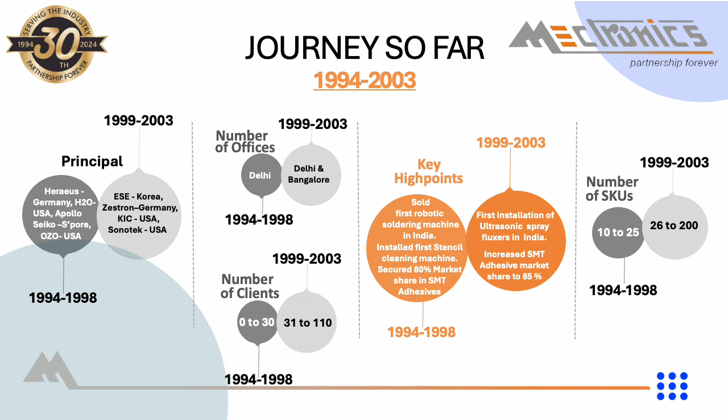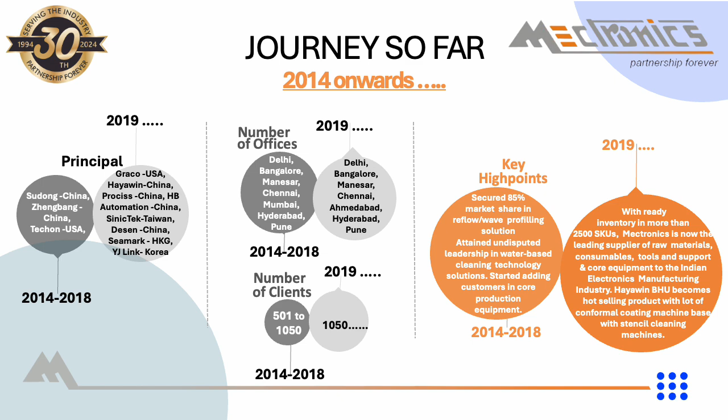Moving ahead from consumables and tools to equipment, in the last 4 to 5 years Mectronics has gained market share in PCBA machines, and now Mectronics bids their equipment in all the leading projects in India. Substantial appreciation has been received from the industry for the equipment sold by Mectronics, specifically for the BHUs from Hayawin, and hundreds of Hayawin BHUs are operational in the market.

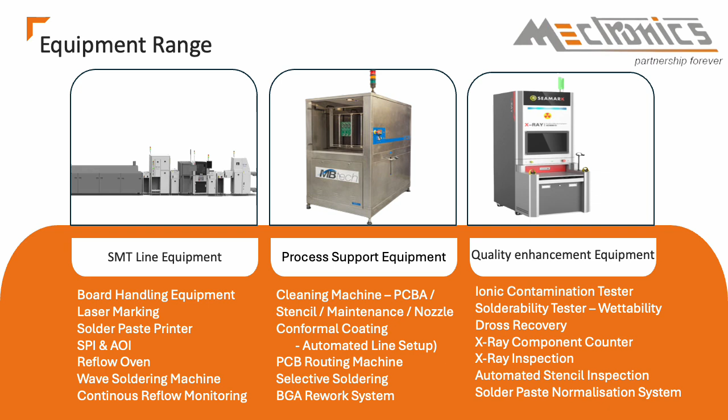Huge installation base for EPS stencil cleaning, MB-Tech PCB cleaning, Prociss conformal coating machines, EVS dross recovery machines exist all over India. After KIC profilers, now KIC RPI is the industry standard system for continuous monitoring of reflow ovens.

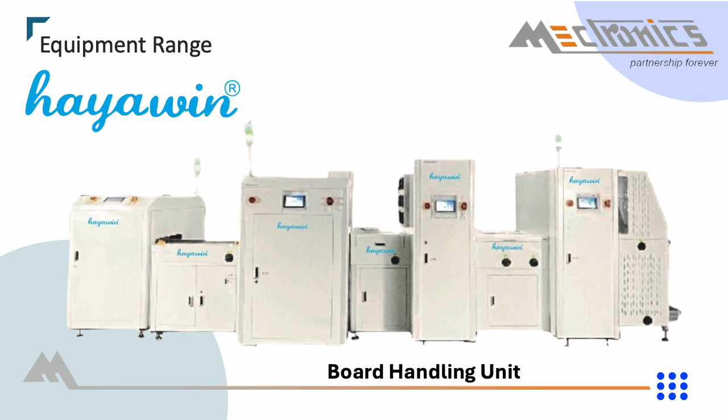Hayawin is one of the top 3 suppliers of board handling equipment in world market. They specialize in high-precision solutions for PCB handling. Hayawin's products offer durability, reliability, and flexibility for various PCB sizes and production environments.

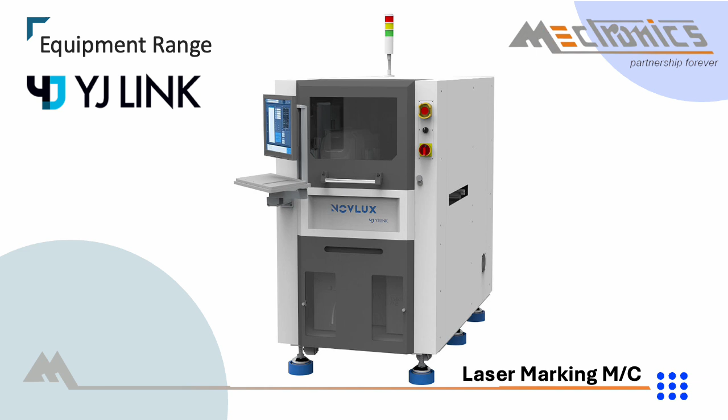YJ Link Korea's CO2-based laser marking machine offers precise and permanent marking solutions for various materials, including PCBs. It delivers high-speed, non-contact marking with excellent accuracy, ideal for traceability and branding in electronics manufacturing.

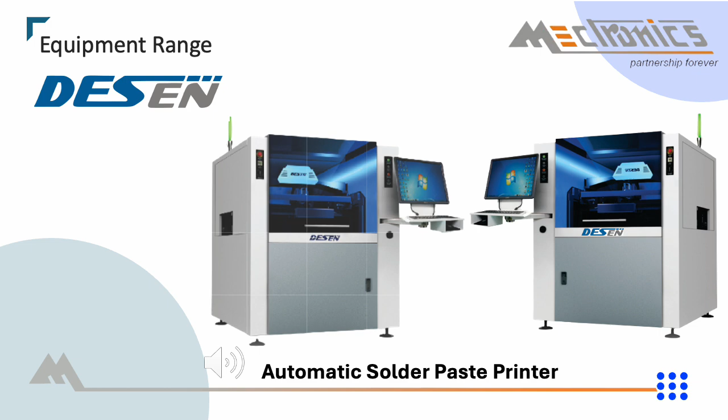Desen is one of the leading brands globally for high-end solder paste printer. Desen features advanced precision alignment technology, ensuring highly accurate stencil printing for improved soldered joint quality.

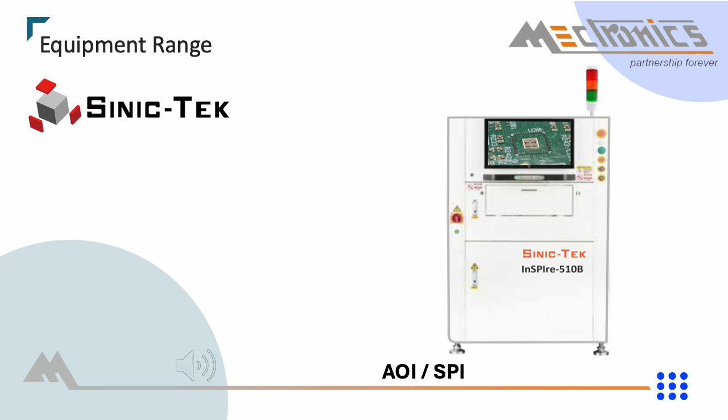Sinic-Tek Taiwan's SPI and AOI systems integrate cutting-edge 3D imaging technology, providing highly accurate real-time inspection for both solder paste and component defects, ensuring superior quality control in electronics assembly.

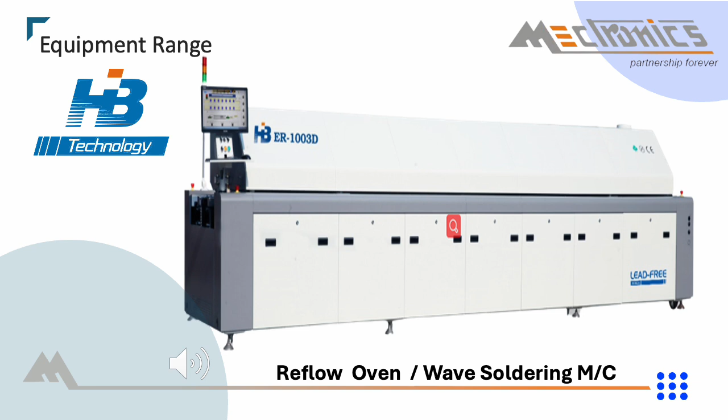HB Technology, China's reflow machines and wave soldering feature energy-efficient heating systems that reduce power consumption while maintaining optimal thermal profiles. Additionally, they offer precise temperature control with uniform heat distribution, ensuring reliable solder joints and minimizing defects in PCB assembly.

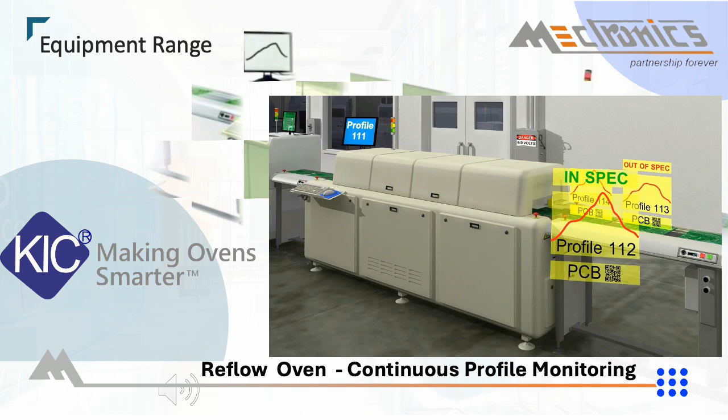KIC RPI is a very effective system for zero-defect manufacturing. With KIC RPI, complete traceability of each and every board produced is possible.

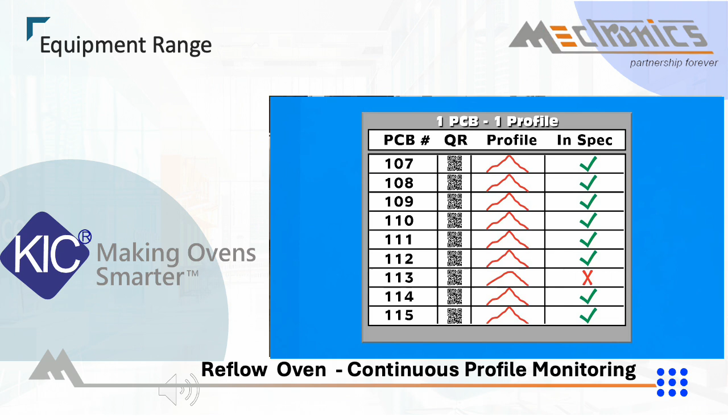It can be interfaced with a barcode reader. Each and every produced board will have its thermal profile. KIC RPI can be integrated with SMEMA, and hence if any problem is observed, the SMT line can be stopped until the problem is rectified.

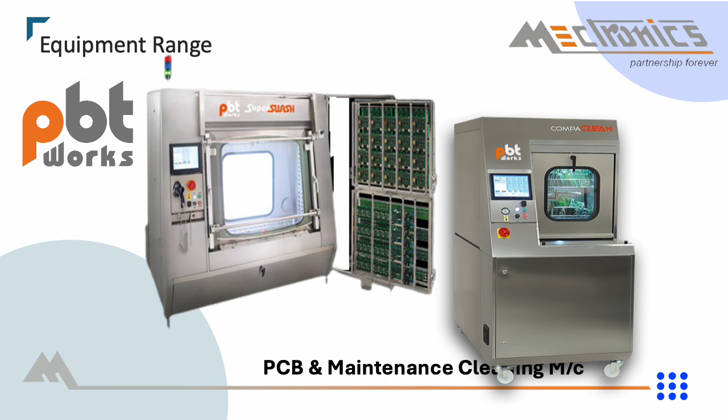PBT Czech Republic specializes in advanced PCB, stencil cleaning and maintenance cleaning systems that ensure thorough removal of solder paste and contaminants. Their solutions use environmentally friendly technologies, enhancing production quality while maintaining sustainability in electronics manufacturing.

MB-Tech France offers comprehensive cleaning solutions for stencils, PCBs, and maintenance, ensuring high-efficiency contaminant removal. Their systems focus on optimizing production quality while supporting eco-friendly and cost-effective cleaning processes in electronics manufacturing.

Make in India, EPS stencil cleaning machines are very reliable, efficient, and cost-effective to be used with water-based cleaning chemicals.

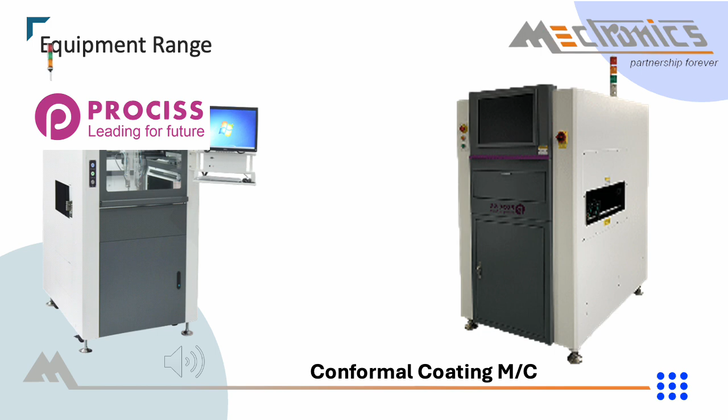Prociss conformal coating machine have multiple models to cater to all kinds of conformal coating. Very efficient and reliable machine with a lot of installations at multinational companies. EPS conformal coating made-in-India machine is very accurate and precise, with a lot of installations in India and worldwide.

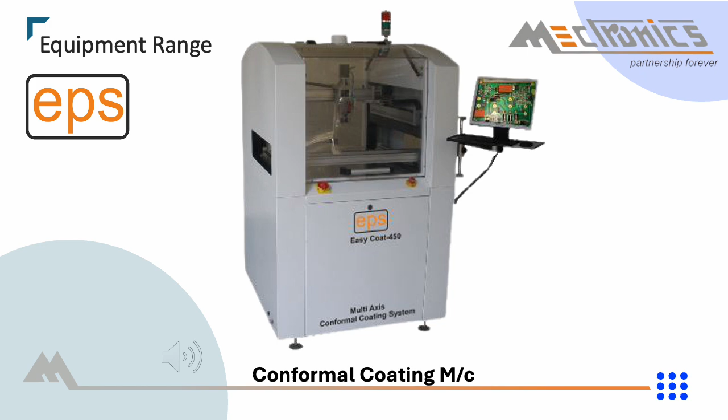EPS is an Indian company, producing wave soldering machine and reflow oven for low to mid-range production. Also makes small solder dross recovery machine.

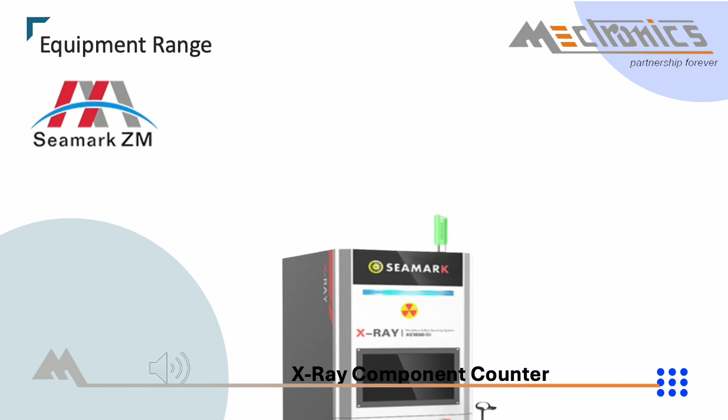X-ray counting machines comply with strict CE and FDA standards.

YJ Link Korea's PCB routing machine delivers precise and automated depaneling, enhancing efficiency and reducing stress on delicate circuit boards during separation.

AST China's selective soldering machines feature precise robotic control for targeted soldering, minimizing thermal damage and optimizing solder joint quality. Automatic nozzle changer, multiple solder bath, and modularity are high points of the machine.

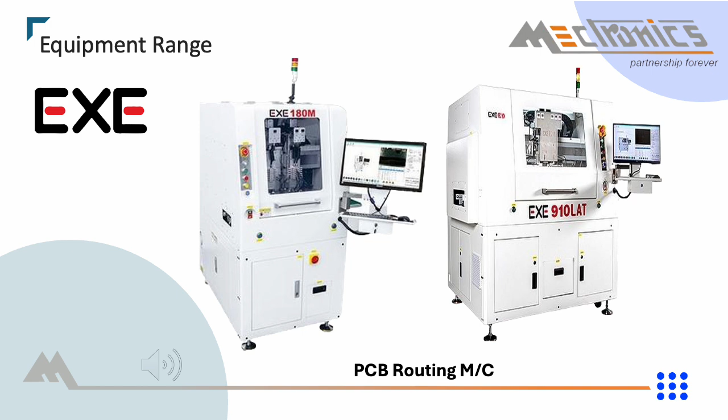EXE's routing machine utilizes a high-precision German spindle, ensuring superior accuracy and durability in PCB depaneling.

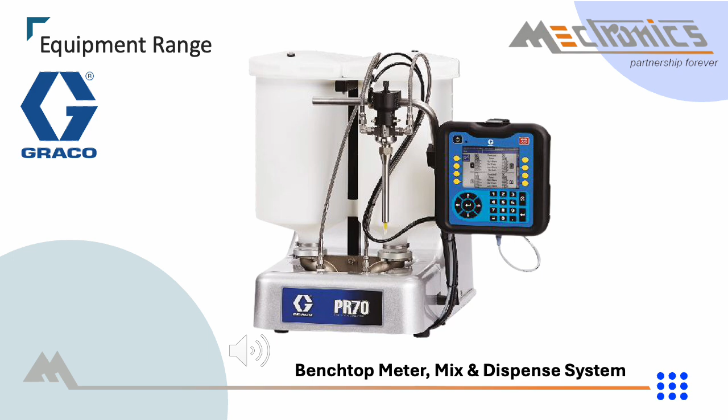Graco USA's two-part dispensing systems deliver precise mixing and dispensing of multi-component materials, ensuring consistent quality in adhesive, sealant, and potting applications. Their advanced control systems and robust design support a wide range of viscosities, making it versatile for various industrial applications.

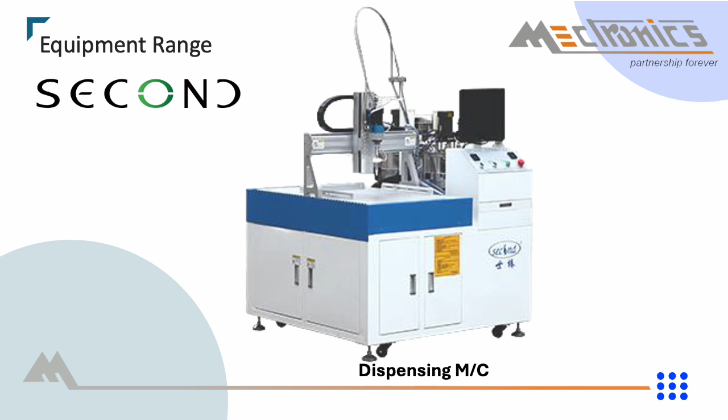Second, a company from China, believes that the customer is first and hence they are second to them. Second produces all kinds of dispensing applications with a wide range of viscosities, from one part to multi-component material, used in sealing, potting, and dispensing applications.

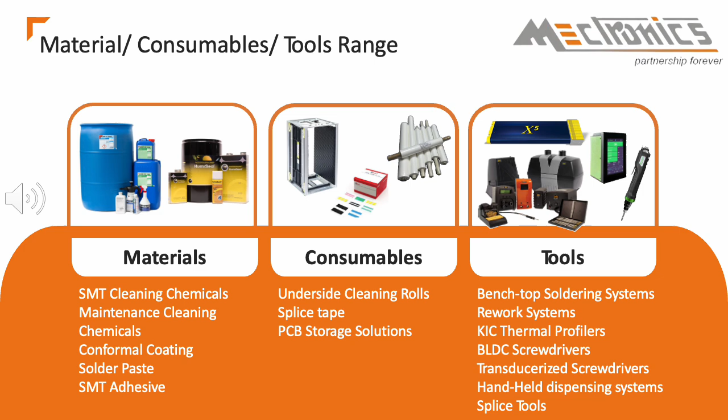Heraeus is a high-end manufacturer of precision-engineered solder paste and SMT adhesive materials designed for reliable and efficient soldering in advanced electronic assemblies.

Zestron specializes in providing high-quality cleaning solutions and services for the electronics industry, focusing on the effective removal of contaminants to ensure the reliability and performance of electronic components and assemblies. Their products and expertise help manufacturers achieve superior cleanliness standards in their processes.

Humiseal is a leading provider of conformal coatings and protective materials for electronics, offering solutions that safeguard circuit boards and components against environmental factors like moisture, chemicals, and temperature extremes. Their coatings enhance the durability and reliability of electronic devices in various industries.

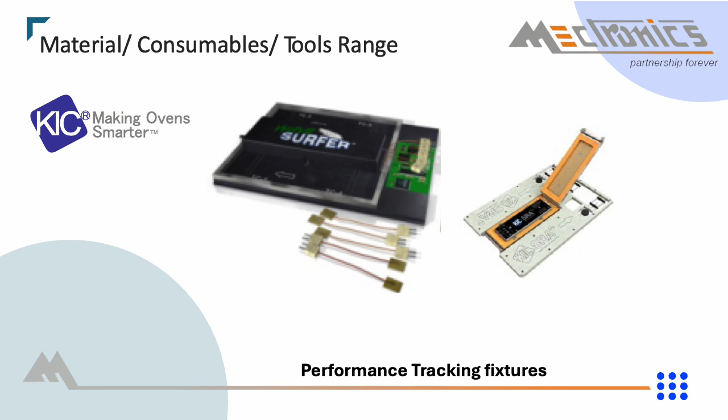KIC specializes in advanced thermal profiling and process control solutions for the electronics manufacturing industry, providing tools and software that optimize soldering processes and ensure high-quality, reliable electronic assemblies.

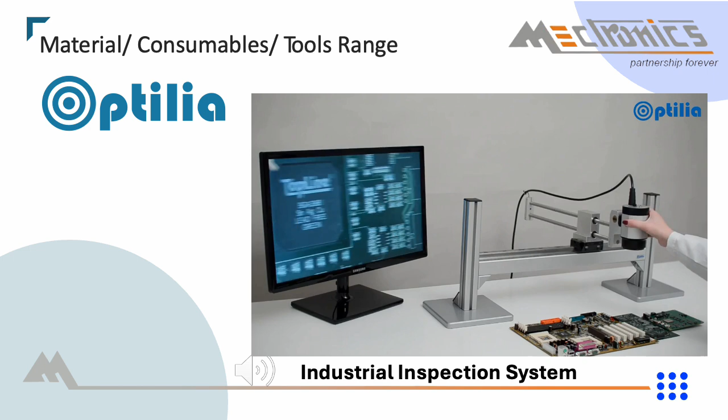Optilia is a Swedish company empowering PCB vision with a wide range of HD cameras and inspection systems. High-definition imaging with advanced optical zoom capabilities, ergonomic design, and real-time imaging make the system unmatched in the industry.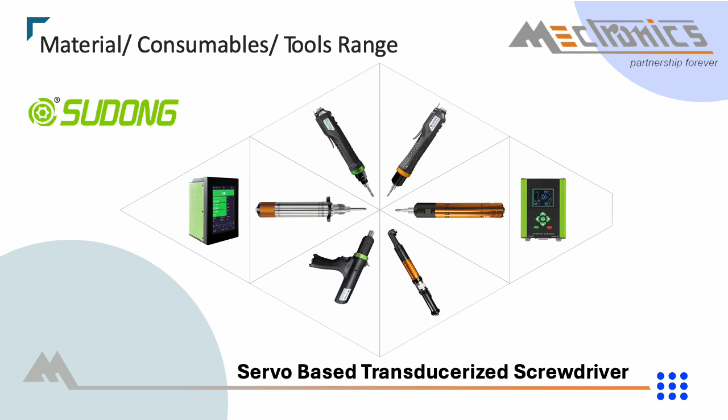Sudong is a specialized manufacturer of high-quality BLDC and servo-based screwdrivers, known for their precision, durability, and ergonomic design, catering to various industrial and professional needs.

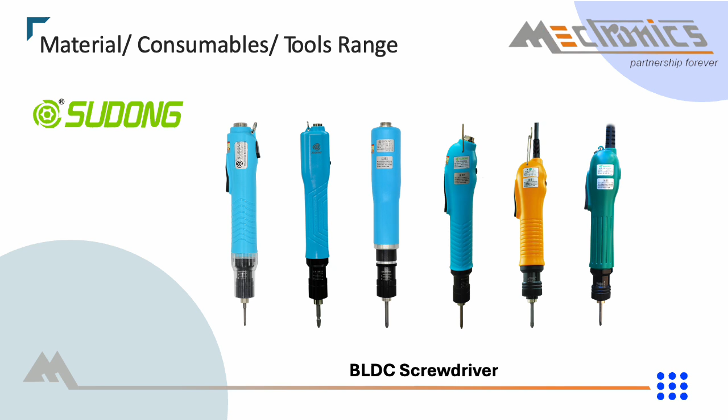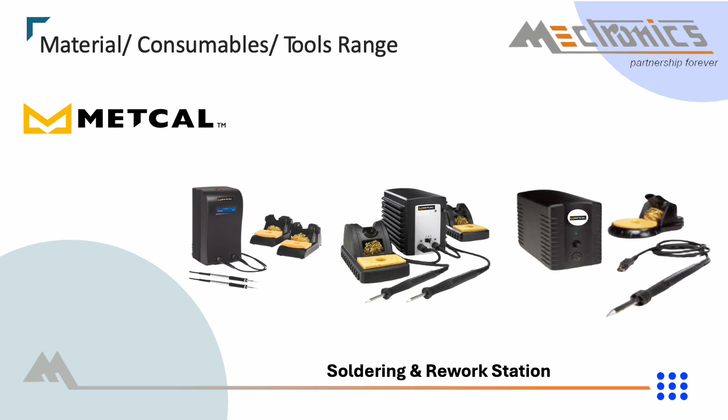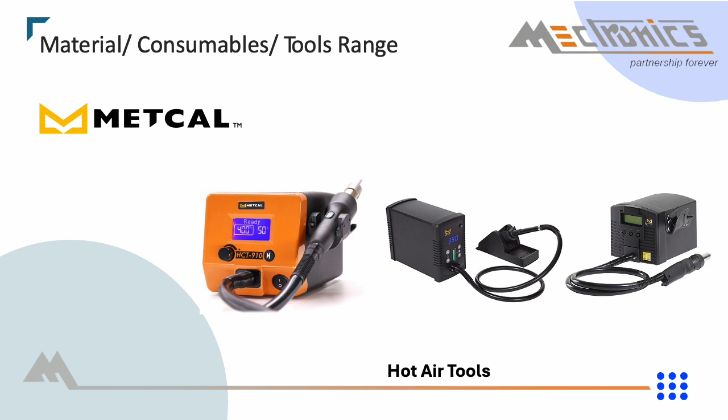Metcal is a prominent manufacturer of advanced soldering and rework equipment, specializing in high-precision tools for the electronics assembly industry. Known for their innovative technologies, Metcal provides a range of solutions including soldering systems, desoldering tools, and rework stations. Their products are engineered to deliver exceptional performance, reliability, and ease of use, helping to ensure the highest quality in electronic assemblies.

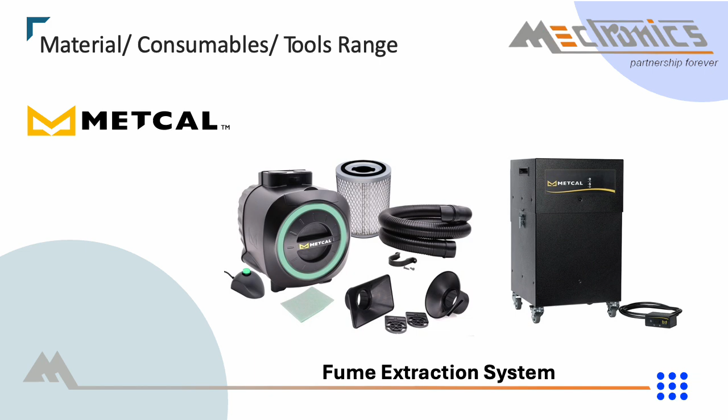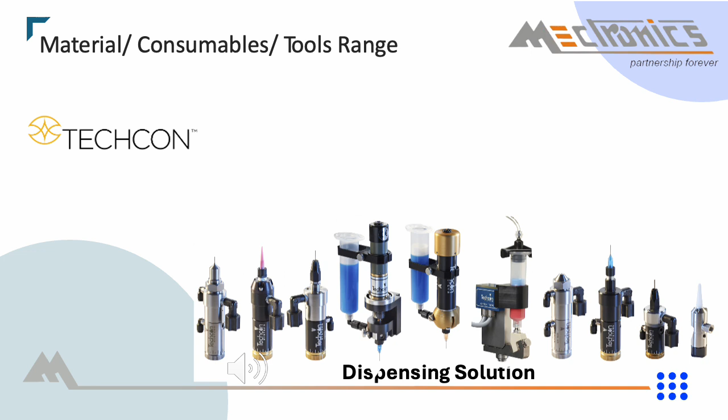Metcal's commitment to precision and efficiency makes them a trusted choice for professionals seeking to enhance their soldering processes and achieve optimal results. Techcon provides high-quality dispensing systems and accessories for precision fluid handling in various industries, focusing on improving efficiency and accuracy in applications such as adhesives, sealants, and other fluids.

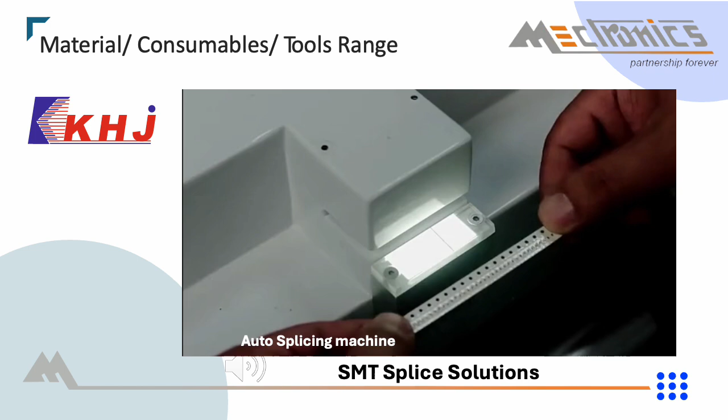Leaders in its category, KHJ from China provides all kinds of splicing solutions including splice tape, clips, cutter, stapler tools, splice trolley, marking tapes, etc.